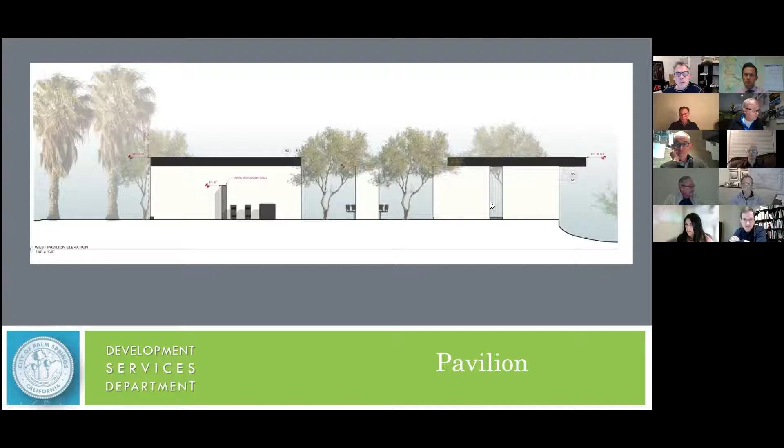The idea here is we have a number of cantilever roofs, especially going toward the south on the main structure. We repeat this on the pavilion to create some dynamism. The hillside falls off right at the edge of that pavilion, so it gives this sense of levity as the roof extends past the edge of the hillside, past the limits of where the functional space stops. The goal is to create a more dynamic environment rather than just having four corners with a solid roof on top. There's a little more going on than that.

And then beyond that, to the west would just be the 6-foot wrought iron fence. Correct, there's a pool enclosure. What's not shown in this rendering, which Bennett mentioned, is there's native landscaping at that location which provides a buffer. It's actually on our client's lot, and Bennett can speak more into the specific type of planting that exists there if needed.

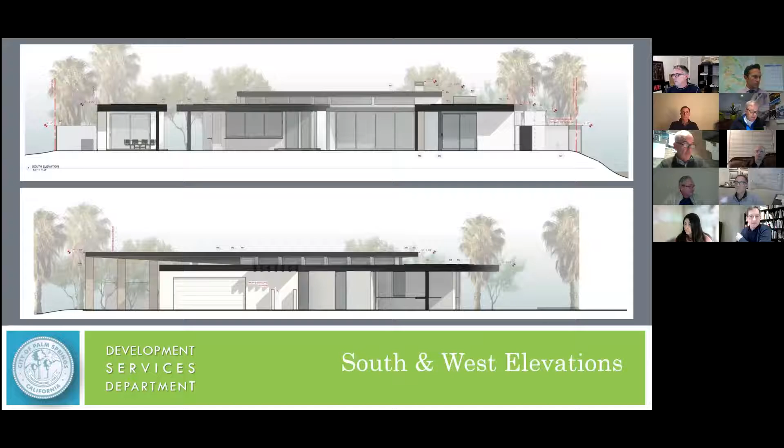And the pool equipment will be screened from the adjacent residents? That's correct. Let me go back to the site plan. The pool equipment ends up on the east side of the property, basically down at the bottom, where there are a number of text notes. We have both AC and pool equipment, a CMU wall screening the master garden, then a metal fence screening the equipment.

Okay, so on the west side, it's just like an AC unit? Correct, like a couple. There's one condenser package and two mini split units.

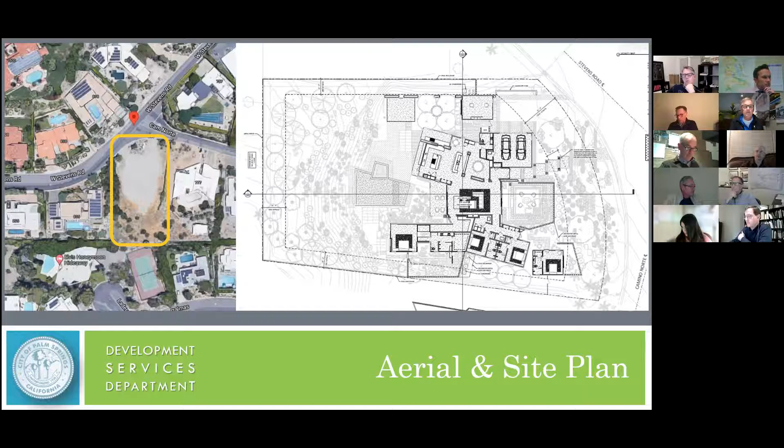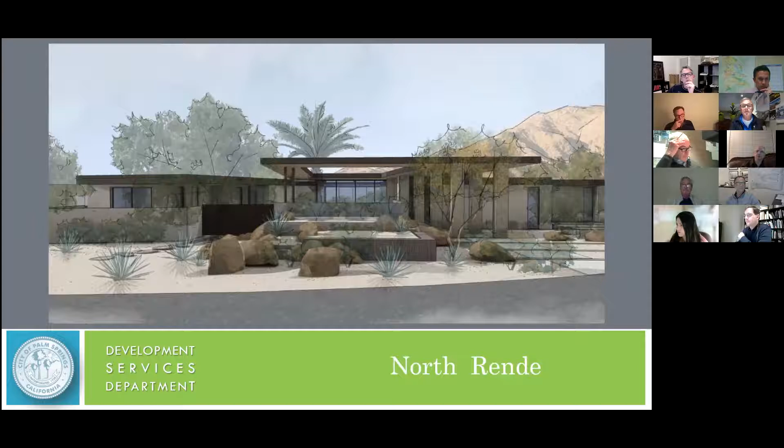Correct. Okay, Alex, can you bring up page 22, 23 of the booklet? What photo would that be? It's an axon aerial kind of photo looking southwest from the northeast. Tom, I think it might help you a bit. Yeah, it's the next page, sorry, go back. One more, oh I thought it was there. There's two kind of axon aerials, it's marked at the lower right corner of the 11 by 17, it says aerial perspective, page 23.

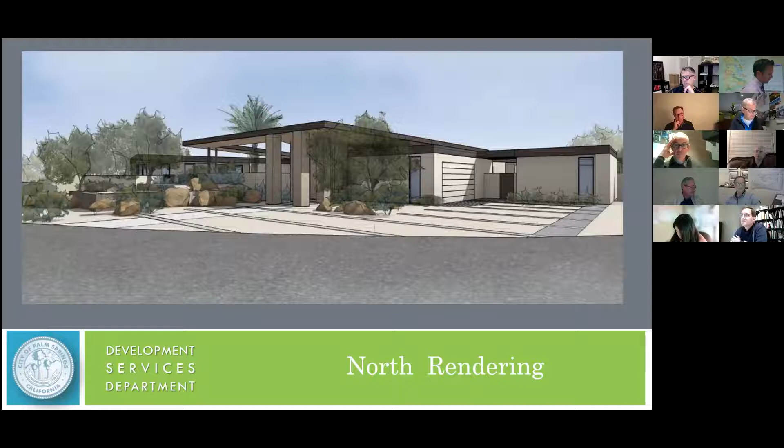Alex, I believe those are the last two slides. Yeah, oh yeah, the last two. That's right, it's actually the very last slide. That's the last slide I have. That's not a landscape slide.

Okay, well I think they've explained it well. The other question I had is on the landscape plan, it calls out gravel to be determined, and is there any thoughts on what the material would be? So it's indicating graphically that the whole front of the residence as well as the driveway is one material. I guess my question is, there will be a turning radius to come into the garage and so forth, and I'm just wondering, will the driveway be the same material? And is there an indication of what that will be that can handle the backing in and out and the turning movement into the garage?

Yeah, it'll probably be at least a 3/4 to 1 inch size gravel that happens there. If it ends up being a smaller size throughout, since there is a lot of it, we'd keep the same gravel but a different size, for instance, in the front of the property, but a little heavier in the driveway.

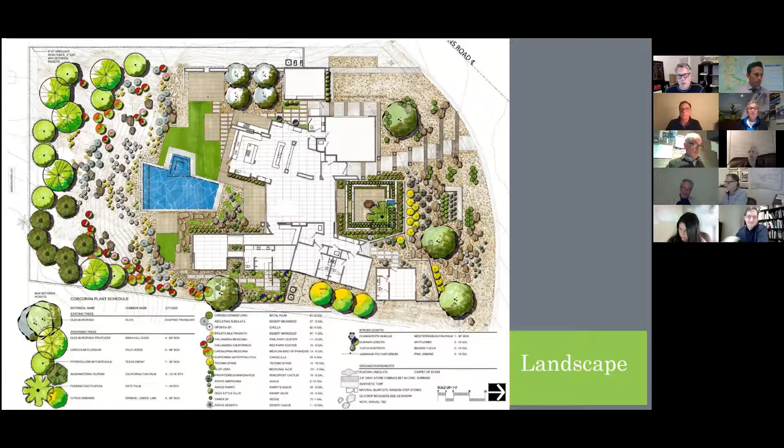So anybody on the committee like to make a motion? I will. Go ahead, John. To approve with the conditions as outlined by engineering and planning. Anybody like to second? Second. Okay, all those in favor? Aye. Sounds good. Thank you, Mark and Bennett. Thank you, guys. Thank you all. We appreciate it.

So we're going to move on to unfinished business. Item number 3, Epstein Global for revisions to a minor architectural application for a remodel of an existing cannabis dispensary, 4765 East Ramon Road. Can we have a staff report?

Yes, chair and committee members. So as you may recall, this item was reviewed by the committee on September 20th of this year, when the committee reviewed the initial design for a repaint, some new rooftop screening, and really a limited scope for a tenant improvement and some additional exterior improvements to this existing cannabis dispensary.

At that meeting, the committee recommended approval to the city council and provided some suggestions relative to improving the exterior, specifically the landscape area, the railing along the front, as well as some other minor recommendations. The item went to the city council on October 14th of this year, and they referred the matter to the committee for additional improvements to the project to really improve this corner of the city. So staff provided the applicant with a series of items that we thought would help improve the design of the project. I'll go over those with you now.

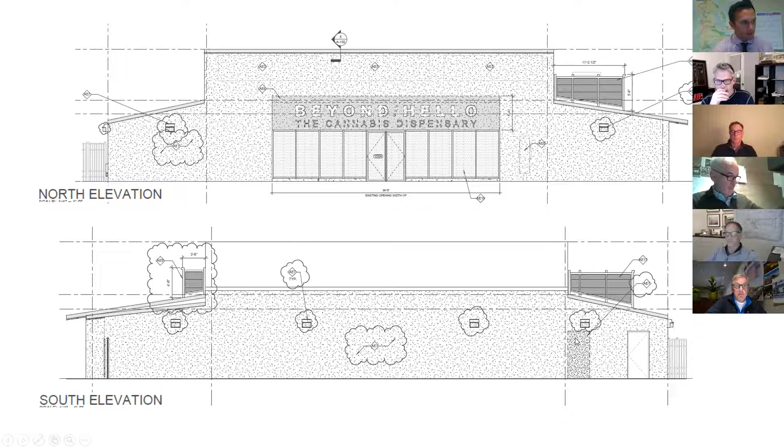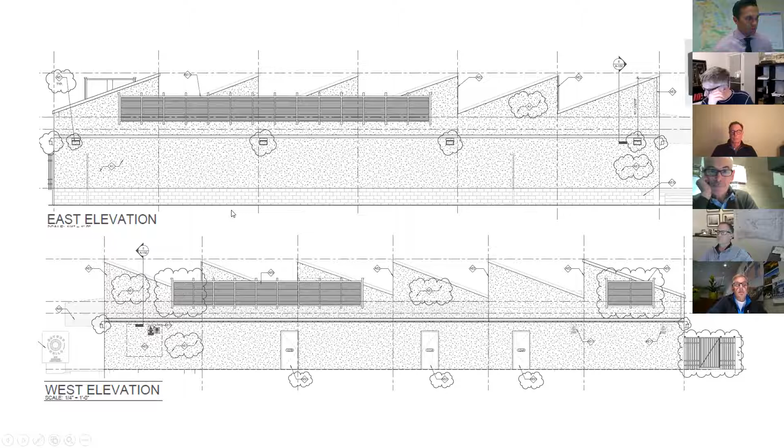On the south elevation, they are doing the same with the lighting and repairing a doorway here with stucco and repainting that elevation as well. As you recall, they are proposing a screen for the rooftop mechanical equipment required for this business, so that is not changing, it remains the same. But as far as the wall packs on the elevation now, those will be replaced with this detail here at the top right of the screen. So all four sides of the building will be painted, and they're proposing to replace and repair stucco and improve the elevation.

They are proposing the hand railings as recommended by the ARC at your previous review at the front entry of the property along Ramon Road. And they are proposing two planters, which I'll show you the details of here in just a moment, at the corners of this platform area.

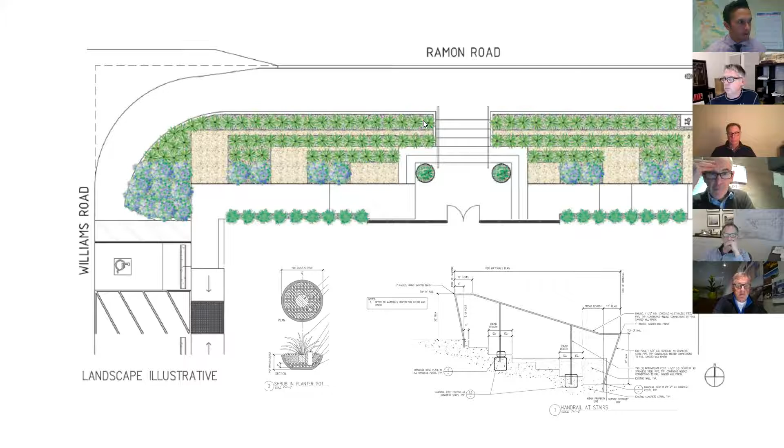One item that's not identified in the plan that I did talk to the applicant about after we published the report was relative to the wall, the planter wall along the edge of the property. That was a comment to repaint that wall to improve it, and so the applicant will be painting that wall to match the same color of the building.

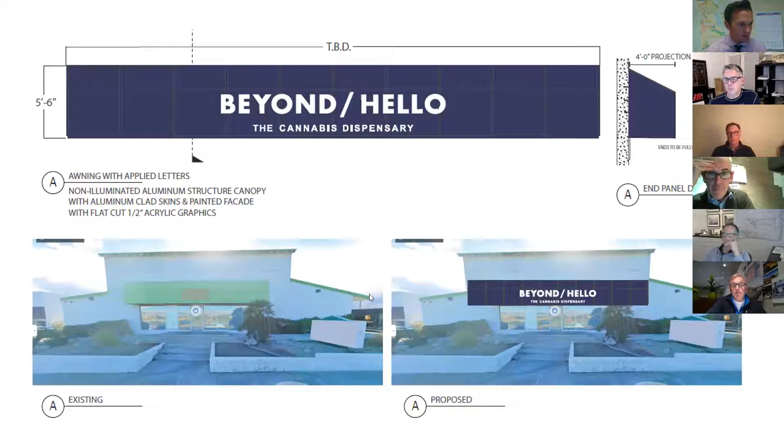So with that, I will conclude my report and I'm happy to answer any questions. Thank you.

Sean, you are muted.

Yep, thanks, David. Thanks, John. Is the applicant available? Yes, this is Andrew Poppy from Epstein.

Would you like to make any comments or presentation? If so, we'd like to limit you to 10 minutes, if possible. Sure, I don't think I'll take 10 minutes.

Based on the comments and review from our last session, the client and Epstein worked together to devise a plan that would satisfy what comments would need to be satisfied for this.

The client is well aware of the current condition of the building and wants to make it look much better, obviously for their own business.

They're proposing to replace all of the stucco and then paint and replace and repair the eaves as necessary. We know that a lot of the existing eaves and the trim work on that building, some of it's just dry rotted out. That will be replaced as well to bring the building up to a better look.

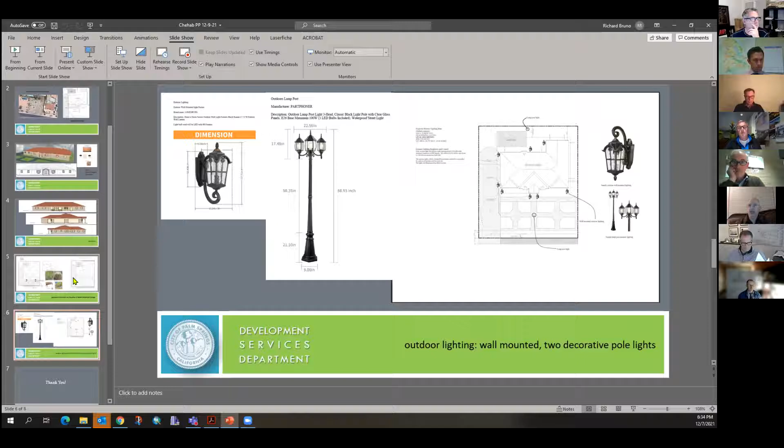So we will not put a pool for a few years until we feel it's safe enough. The idea of a park, we wanted to have some sitting area, and with a lot of help from Richard Bruno, Mr. Bruno, he gave me a lot of advice, and the idea of a park developed that way. I'm very grateful to his pointers for the front yard. I can answer any questions if you have any.

You mind repeating that last point? You were, I think, thanking Richard Bruno for something with the front yard. Yes, I was planning the front yard. Initially I was just going to put some gravel and so on. And then it developed over time, back and forth. I got a lot of advice to make it nice, like a park.

Originally, I just wanted to put some stones and some gravel, stuff like that. But the idea developed, and he advised me to put trees to put some shade on top of the benches. I wanted to put the benches in, but he suggested I put trees to shade the benches, things like that. So I'm grateful for that. It makes it much more user-friendly, I guess, when the sun is shining.

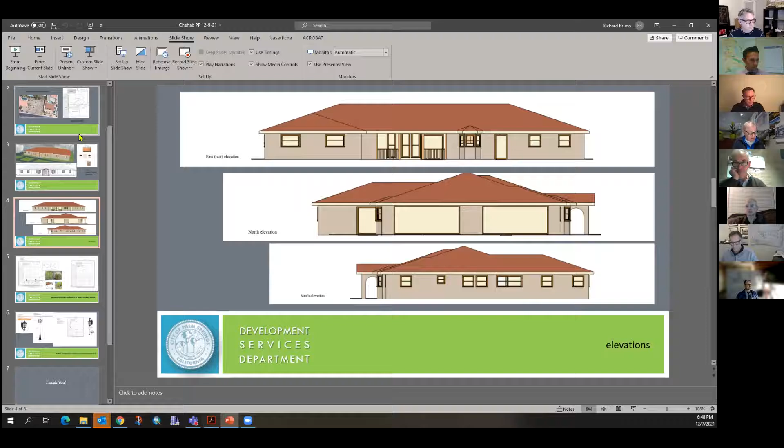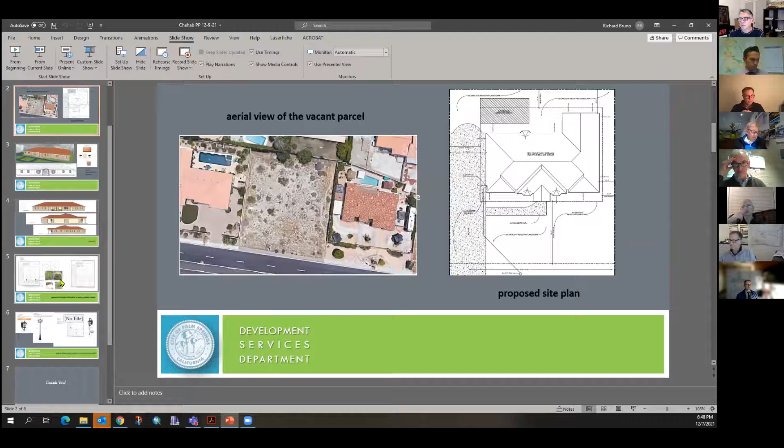And then secondly, on the site plan, and I'm understanding based on the explanations about the kind of formalized garden areas, I think there could be something where you place some trees in each one of those squares. I'd also like to see some foundation planting or planting up between the last walkway and the building itself. I think there's the opportunity to frame the structure and create a more pleasing aesthetic.

Both of the facade of the building and really give this area, as you mentioned, that park-like atmosphere. And then thirdly, I'm not sure what the setback would have to be for any type of wall, but maybe there could even be a low wall. It doesn't necessarily have to be 5 or 6 feet, but I feel that with the busyness and the traffic along that street, even a low wall...

Would be advantageous to kind of give that sense of privacy and personal space away from the street. And so I would defer to planning on what the setback would be, even if it was like a 42-inch wall or some kind of low wall, if he wanted to keep most of that open. A 4-foot high wall can be constructed on the property line. And that would be the dark line we see where it says right-of-way dedication between. That's correct, yeah, where he's calling out the fence right now.

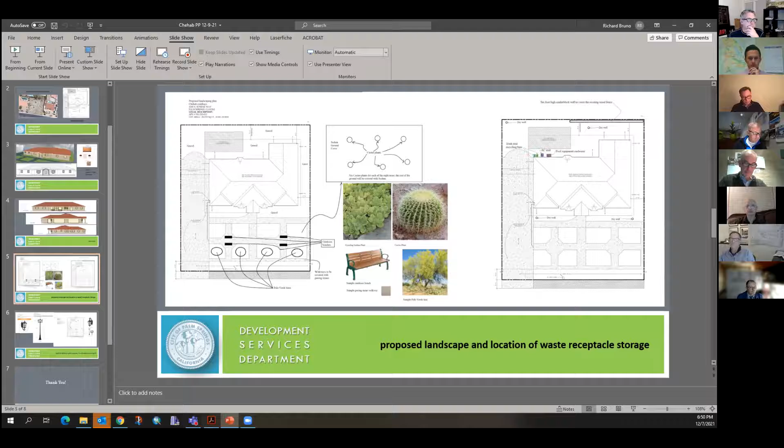Yeah, and I think each of those squares or those shapes could be, it's almost going towards a formal garden look where you could, as Chairman Locklear mentioned, either reinforce the design with low material, medium hedge material, just build upon the geometry there and create the atmosphere that you're looking for.

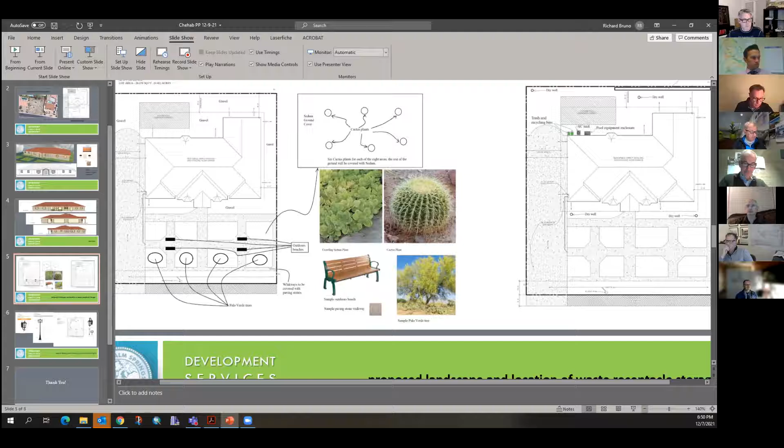Okay. But I think we do need to see a more developed landscape plan that reflects the proposed site plan and addresses some of these other items that we have talked about.

Okay, thanks Tom. I'll make one more quick observation.

Sure. The one thing you may want to think about is, again, you can do what you want, but having an AC unit, pool equipment, and trash enclosures right there beside your pool is probably not going to be a good place for those. Because if you're trying to use the pool and the air conditioner's on, the pool equipment's on, it's going to be pretty noisy right outside the back of the house. So you may want to think about better locations for those, away from the future pool.

And I made another observation: even the locations of the benches are kind of on your axis for your walkways. They could maybe be put more along the north rather than right in the middle, blocking your walking path along the north-south or east-west axes of those planting areas. Or even rotated 45 degrees from where they're shown now might allow better circulation. Right, exactly, correct.

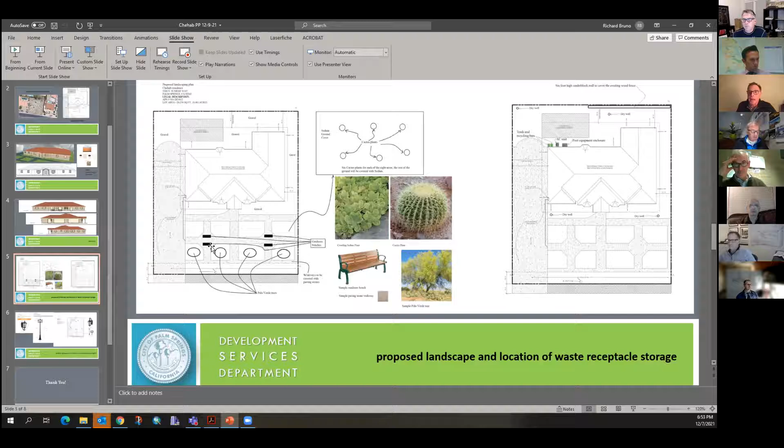Yeah, along that line with the axes and your walkways, you've also got a light post smack on axis with your front door. So the visual cue of the center line of your house is really broken by having some type of fixture like this. They're not a standard choice for residences in this town. And then I see you've got two of them.

One at the back property line, which I think will possibly concern the neighbors. As I look at the height of this, it's 7.5 feet, and those light bulbs will be up above any perimeter wall on the back. I think your neighbors may have an issue with lighting up their backyards from your fixture. Should I remove them, I wonder? I wonder if you can't achieve something a bit more subtle, but with the same impact, that achieves your lighting needs with some low voltage landscape lighting that just kind of candle-lights the yard.

Yeah, I think they might become problematic. I think John McCoy's talking about the rear neighbor, but as I look at that front one again, I wonder if it's not kind of fighting with the architecture and the subtleties you're trying to achieve here. Well, would it be a good idea to remove them?

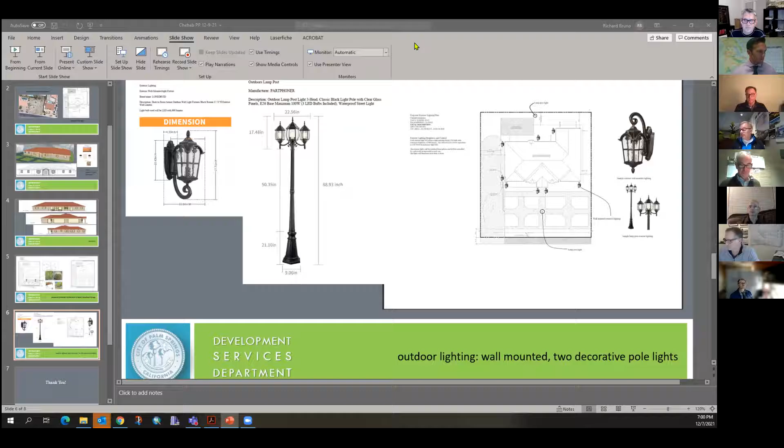Motion, take a vote. Shall we get a count on the ayes? Aye, aye, aye. That was easy. Motion passes, 5-0.

Item 5, last one. Everybody still good to push on through this? Yep, crank through. Yep, okay.

Palm Springs Propco Holdings LLC for a minor architectural application for an existing 12,000 square foot commercial center, to include facade and landscape improvements at the former Sossa Market Shopping Center located at 3700 East Vista Chino, which is the northeast corner of Vista Chino and Gene Autry.

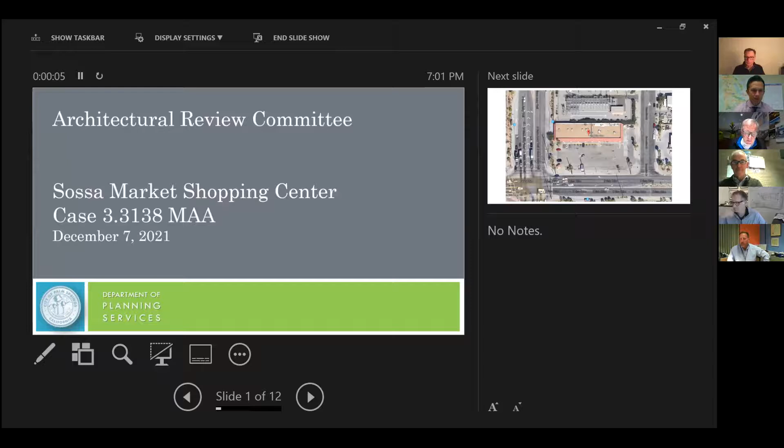Glenn, we've got both screens on the display. And you're muted, sorry about that. Let me get it so it's... Can you see that now? Is it full screen? No, not really. Well, let me stop sharing, let's try again. How's that? Yay, okay, great. Sorry about that, you'd think after all these years we'd have it figured out.

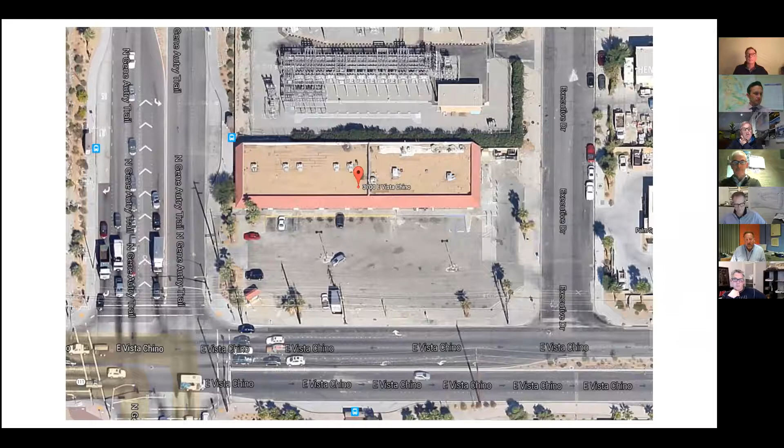So this is the former Sossa Market at the corner of Gene Autry Trail and Vista Chino. Here's an aerial photograph of the site. The Architectural Review Committee reviewed this project back in 2019 for a renovation of the shopping center, parking lot, and landscaping. This is all because there's a cannabis dispensary and lounge in Unit A, the first unit on the corner of the building facing Gene Autry Trail, so they were required to come in and get approval of the renovation of the front of the building. This is a current photograph showing the mansard roof that's there, and the units that include a market, a poke bar, and the cannabis lounge Truly Leaf at the end of the building.

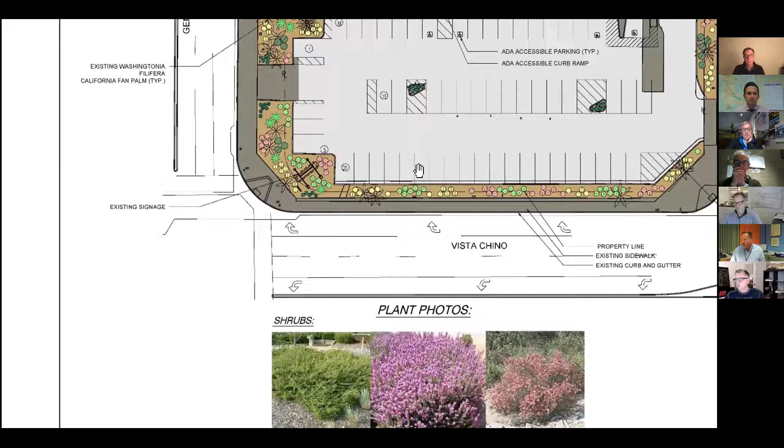So looking at the proposed landscape plan, let me zoom in here. They are proposing a series of shrubs and plants along Vista Chino and Gene Autry Trail. Keeping in mind, and I'm going to show the ARC the previously approved plan in just a minute, but this is what they're proposing now. You'll see there's a series of plants along the street.

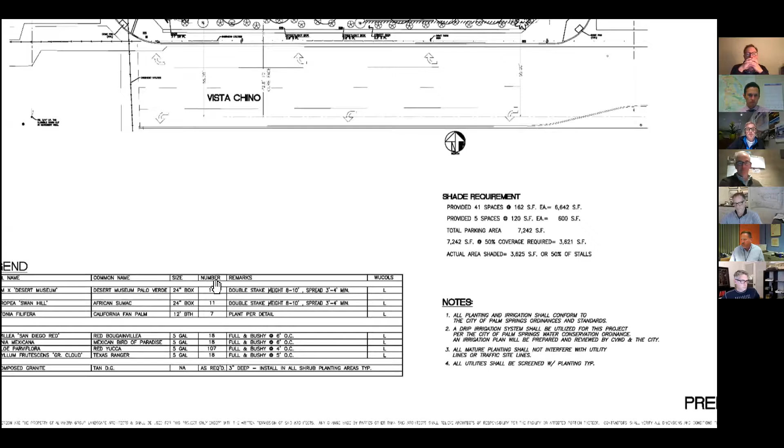This is the plan that was originally approved, and I'm sorry, this is in your packet, but you'll see that they had up to 14 Palo Verde trees that were to be planted along the street within the reworked parking lot. In this proposal, they are not going to rework the parking lot, they're going to restripe it and keep it as is. This is all to scale down the cost of the project, and they'll provide that to you in just a minute.

Glenn, I'm sorry, can you just repeat, this plan we're looking at right now was what again? Was approved in 2019 by the Architectural Review Committee.

So this is what they're proposing now, which is in your packet, and this is what was approved. You'll see that the parking lot is different, and the number of trees have been eliminated.

Looking at the facade of the building, they are proposing to leave the mansard roof but skin it in a standing seam metal in a gray color. The unit here in white is where the cannabis dispensary lounge will be.

The poke bar is in the middle here, and you'll see varying shades of gray and white as you go east towards the market, which is on the east end of the building. The rear of the building will be painted white, and that's what this elevation is.

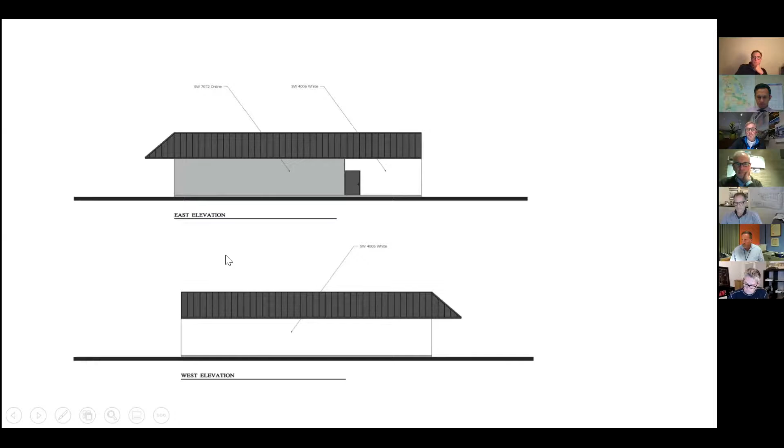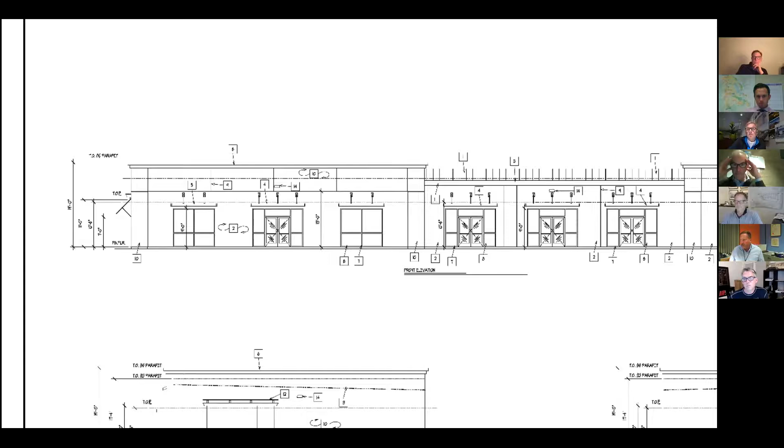Once again, there's a material board in your packet showing the colors proposed. Now we'll move on to what was approved by the Architectural Review Committee back in 2019. You'll see it was a more linear, horizontal roof that removed the mansard roof but added different elements to add height and provide screening for mechanical equipment on the roof. So this was what was approved, and they are not looking to do this design.

Going back to the landscape plan, as I mentioned, you'll see that the parking lot is not changing. There are two entrances off of Executive Drive, one off of Gene Autry Trail, and they're going to just slurry seal. The lighting will stay the same.

So Member Lockyer, that concludes my report, and the applicant is here.

Any questions for staff? No, I don't have any questions for staff—that was more for the committee. Oh, I'm sorry. But thank you, you're crystal clear. I have a question on this project, Glenn.

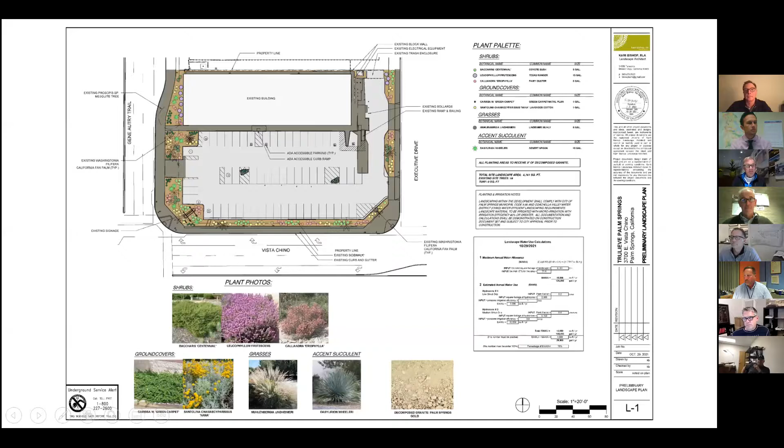If Glenn, would you mind, just for kicks, can we put up that original landscape plan? Just really quickly. It may be worth a minute or two to just take a gander at this. I'm not looking at this too closely.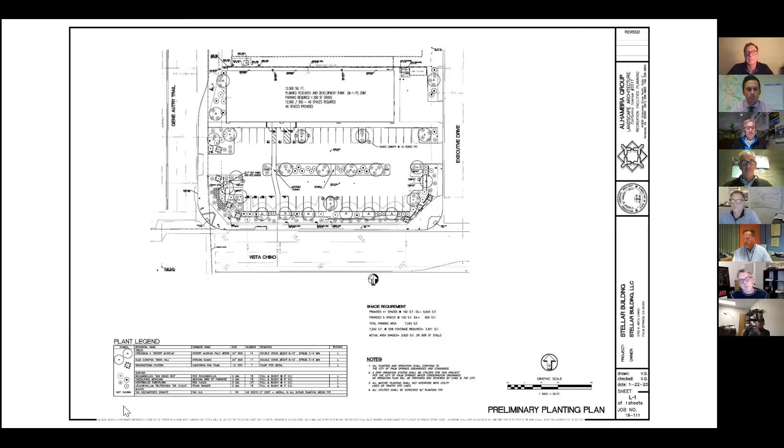I mean, I would even say if this were presented today, I might even argue that some of those box sizes are too small. I didn't see anything over 24, and frankly, a lot of 24-inch material can look like a twig. I might specify some of the calipers on those, or a certain dimension to a mature tree canopy. I could elaborate on this more, but I'm counting.

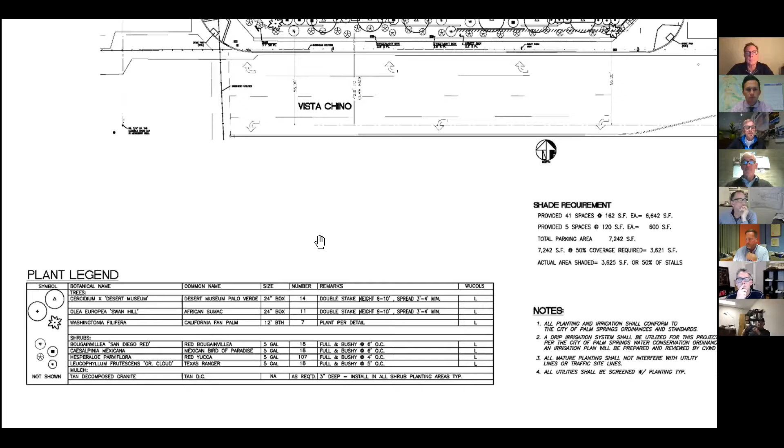There's the legend. So there's 25... 32 trees proposed on this plan and zippo on that new one. So you gotta get somewhere between 0 and 32, and closer to 32, pretty far away from 0. Oh, I agree, I agree.

I'll present it to the owners and see what they say. I do appreciate your time. Yep, okay, all right guys, thanks. Glenn, could you pull up the previous elevations as well?

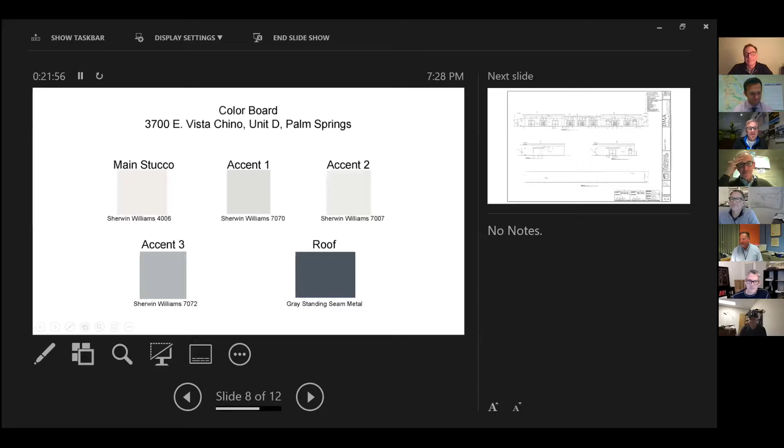We're not gonna let this die. Move on. Can you see that? Yep.

I look at that personally and I say, I don't know. No, really, I think the sloped roof is fine. Maybe you could play with the volumes of it, maybe you don't. I'm gonna stand by that original comment I made about the landscape, and I think John Walsh was echoing what I was saying. He words things a little bit more eloquently than I do.

I think what he was trying to say was the same thing, where the landscape is the controlling chess piece in this building's design and the way it presents itself to the public. And I think if you got the landscape right, you couldn't make too many mistakes with some simple enhancements to the building.

Yes, and this is an interesting juxtaposition of these two images. You know, for all of its sins, that sloped roof consistently tidies up the whole elevation. It just becomes a non-statement, very background. The rest is some signage, pick the right color, and call it a day. But yes, the screaming need is the parking lot. It's awful.

You look at that building and I don't know what I want to go into that shopping center to purchase, but it's not much of anything drawing me in there. I wouldn't even go have lunch in there in my car because there's no shade, there's no relief from anything. There's just nothing drawing me there.

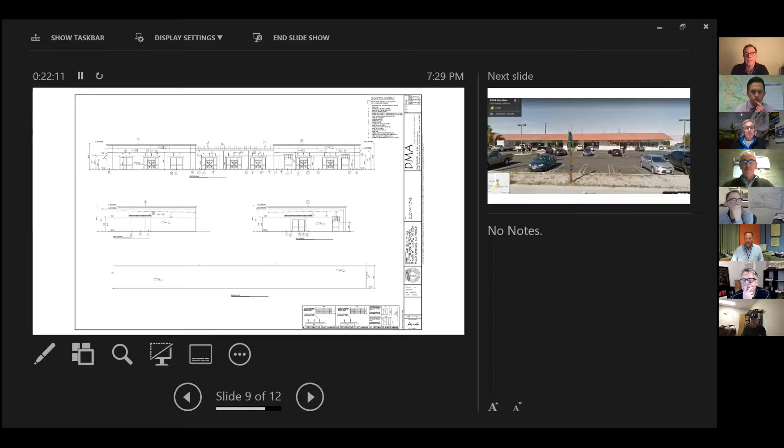I'm looking at the photo of the existing building on the right there, Glenn. I was over on the elevation thing and just getting back to the landscape again, thinking how the landscape could improve that parking lot and the experience of the building, and even a little bit of lighting in there at night, drawing me into that parking lot and wanting to know what business might be in there. Maybe if I'm stuck at the red light, let me just whip it in here and see what they have.

I just want to ask, Glenn, didn't they have a low wall also along the Vista Chino frontage as part of the landscape plan? I'm trying to remember. Yeah, there was, like 36-inch high, 42-inch. I know it's hard to see, but you can see their lines here for the wall.

You're seeing your desktop. Share your image. It's being so difficult today.

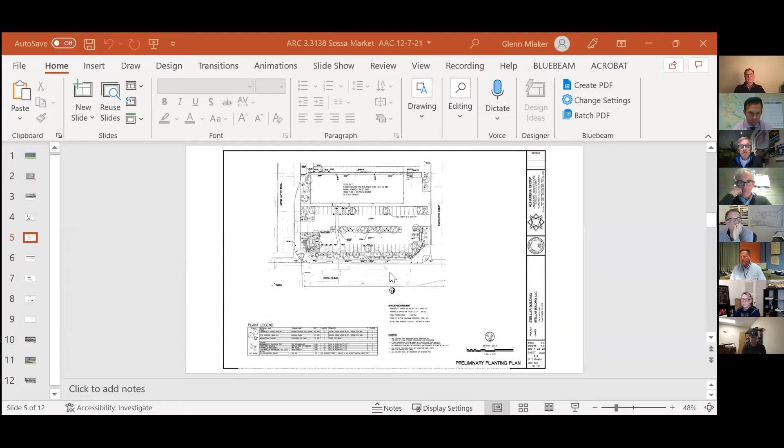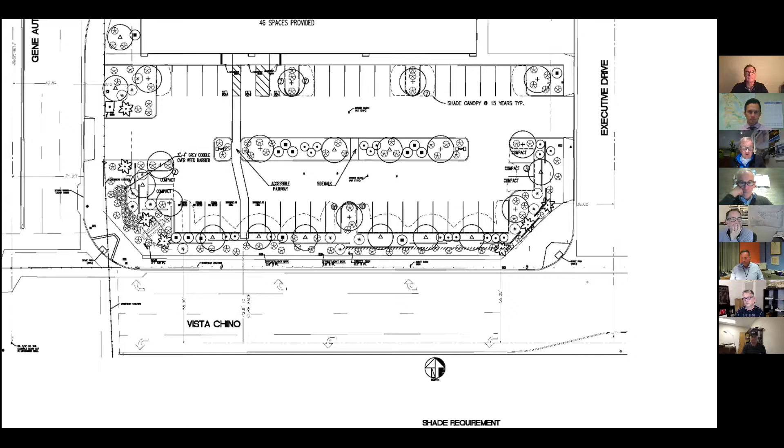So in this plan, you'll see the walls had some movement back and forth, like staggered, offset walls. You know, they did such a nice job across the street at Escena with the patterns and rhythm. They could look at that.

Is this comment time for board members? I felt like we put this one to bed, but we already voted. No, I mean, in general. Yeah, I'm open. I have one more question though, since we're really beating this thing into the ground.

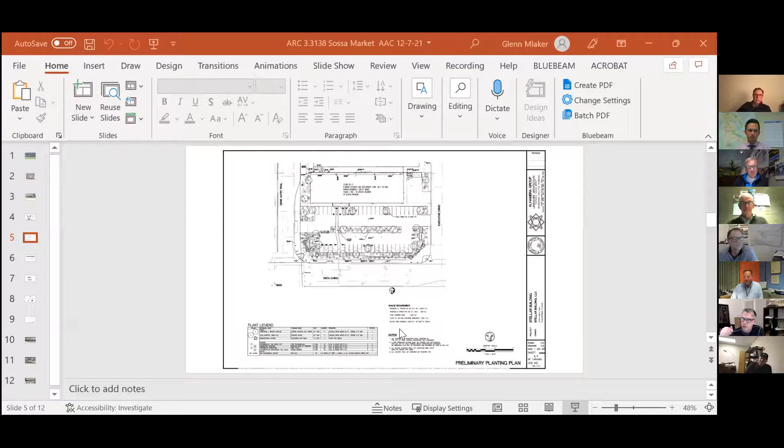Is it possible, Glenn, as I look at the colored landscape plan that was presented, I was about to ask about the adjustment of that sidewalk. Could that sidewalk meander and have alternating landscape strips on both the right-of-way side and private side, rather than having that continuous sidewalk along the curb line? But I realize this is a path I don't want to go down. More money and costs, and we'll be lucky to get near what we're asking for. So it's just an idea.

Go, Tom. I was thinking about some of the other plans we reviewed, the residential plans. I'm wondering if it could be a good recommendation to the applicants if they could show, a lot of times the plan just stops at the property line. If they could show maybe 10 or 15 feet either side of the property line, if there's existing walls or existing landscape, it gives better context. Today the applicant explained there were trees next door and buffering. I think if we saw some of the adjacencies on the plan, it would help us get better context for what they were proposing and why they may or may not have plant material there, and when they're relying on adjacent residence plant material.

I think it's a really good point, and I didn't realize you were making a general comment about future presentations. But that's been one of the benefits of doing these reviews on Zoom - I've been able to go look on my computer and look at Street View and see how a neighbor has turf, and we're talking about adding gravel, and there's going to be a very defined line.